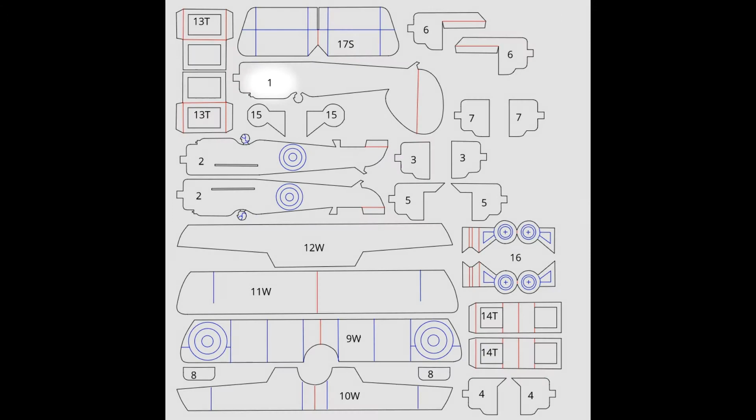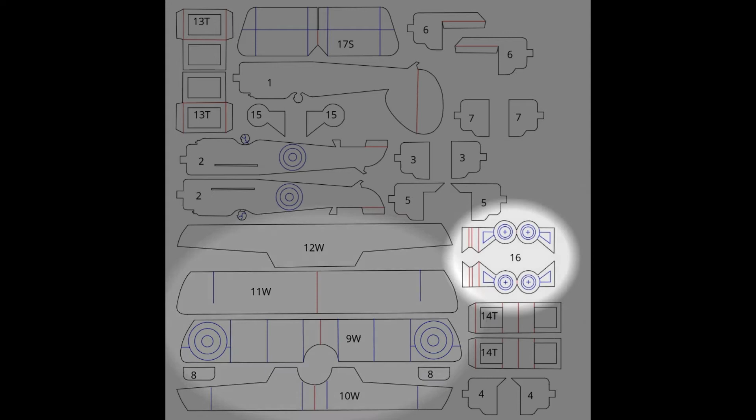You will also have to download the instruction sheet for this course from the library website. Each part of the plane has a number. The number shows the part number and also indicates the order in which to glue all the parts together. There are the nose pieces, the fuselage pieces, the top wing and the bottom wing, the undercarriage, and lastly the tailplane.

Look up on the internet the original colours if you want to be true to the original Sopwith Camel, or you can colour it in any way you like. Take your time and do a careful colouring in of the drawing. There is plenty of time.

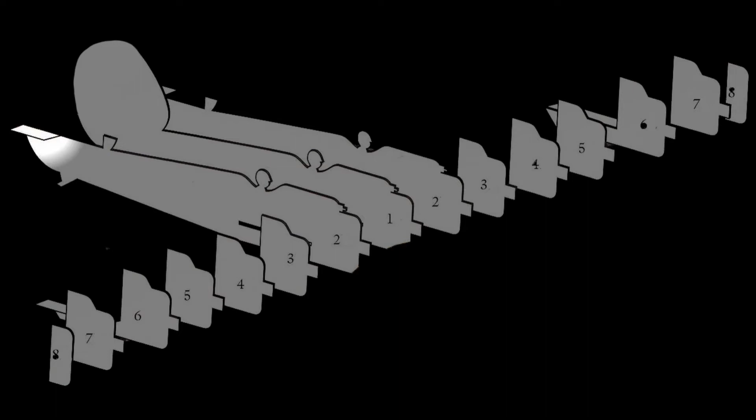To construct the fuselage, select part 1. Before gluing part 2, bend the tabs on the rear of the fuselage out to the side where the graphics has been drawn upon. Then glue part 2 on the right side of part 1 and the other part 2 to the left side. Make sure the tabs are facing outwards.

Similarly, glue parts 3, 4 and 5 to each side of the fuselage. Bend the tabs on part 6 outwards and glue part 6 to each side with the tabs pointing outwards. Then glue the remaining parts 7 and 8 to finish the fuselage. Put the fuselage aside and let the glue fully dry.

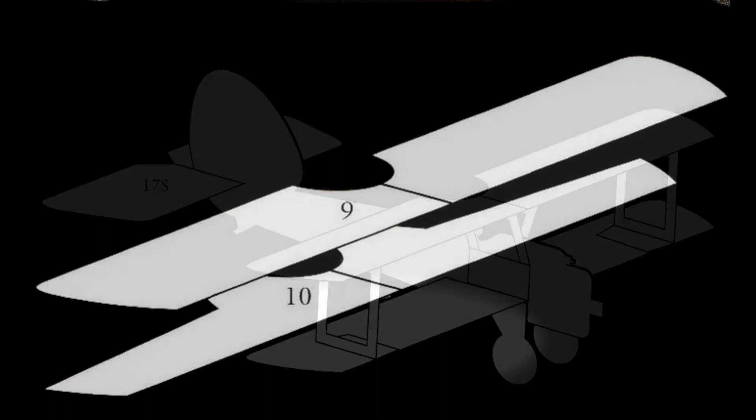While the fuselage is drying, you can start to assemble the wings. In this aircraft, there are 2 wings, the top wing and the bottom wing. The top wing is made up of 2 parts. The wing top is part 9 and the wing bottom is part 10.

Glue the 2 pieces together. Make sure that the top wing has all its markings visible. While the glue has not set, you need to give the wing some dihedral. One side of the wing is bent up on the center line, bend the wing up a distance of 12 millimeters at the wing tip. The dihedral is used to give the Sopwith stability when flying.

Similarly, do the same for the bottom wing. Use parts 11 and 12 with the same dihedral. Let the glue dry before you go to the next stage.

The wing struts support the top wing. There are 2 sets that attach the top of the wing to the fuselage. This is part 14T. And another set that attaches the 2 wings together, and this is part 13T.

We will make the left and right fuselage struts first. Fold part 14 in half and glue together. Fold the tab at the top outwards as shown here. Similarly, do the same for the other part 14.

Do the same for part 13, the wing struts, except that there is a bottom and top tab that have to be bent. Let the glue dry before you go to the next stage.

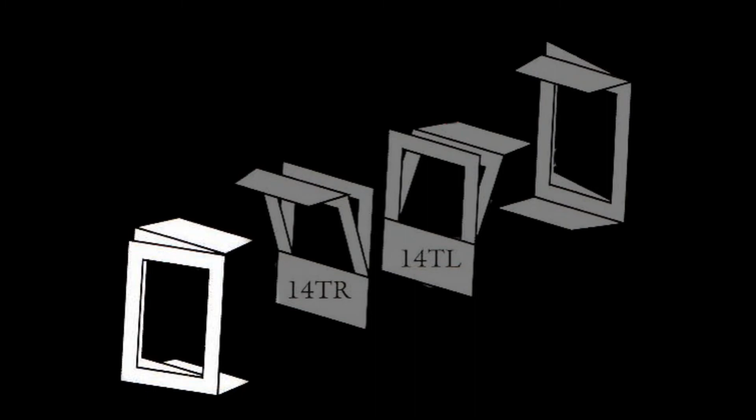The undercarriage supports the whole of the plane while it's on the ground. Its function is to be the main structure for the wheels so the aircraft can move around and take off. There is a left and right side to the undercarriage. Both are the same but are a mirror image of each other.

Start with the right side and fold part 16 as shown in the diagram here or on your downloaded instruction sheet. When you have finished folding the part, glue part 15 between the two folded halves of part 16. Similarly, do the left hand side as a mirror image of the right hand side. Let the glue dry before you start the next stage.

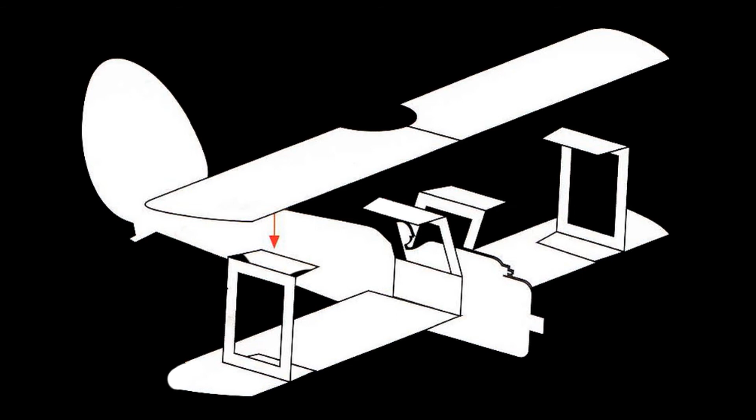Once everything has dried, glue the fuselage struts to the left and right side of the fuselage. Make sure that the top tabs are pointing outwards as shown. Glue the wing struts to the bottom of the wing and let this dry.

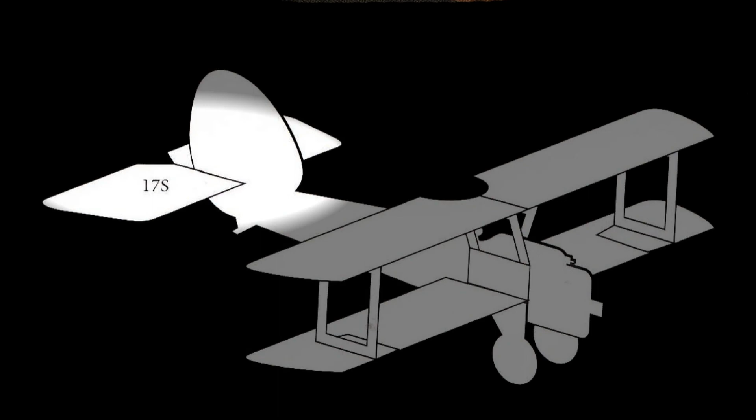Glue the top wing onto the 4 tabs of the 4 wing struts. Slide the tailplane into the slot at the rear of the fuselage. Glue the tabs of part 2 to the underside of the surface of the tailplane to keep it in position. Glue the undercarriage to each side of the fuselage. Once again, let the glue dry before proceeding to the next step. You now have completed the construction of your plane.

The last thing you need to do before flying is balance the model. Using a piece of Blu Tack or plasticine, support the wing near the fuselage about 15 millimeters from the front of the wing. Add your Blu Tack to the nose of the aircraft till the model is sitting horizontal, or just a little below, making it a little bit nose heavy.

Once you are happy with the balance, take your model outside in a grassy area if possible, and if there is a breeze, gently throw the model into the breeze. You might need to do some further retuning with the weight of the nose. Try removing some and see the consequences of less weight. Try the reverse by adding more weight. Have fun flying your Sopwith Camel.